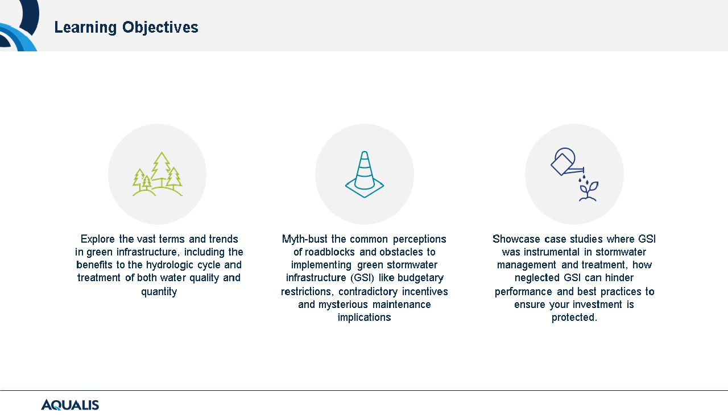We will be discussing maintenance protocols as well as some of the most prevalent green stormwater infrastructure. Additionally, we will showcase real-life case studies where GSI was instrumental in water treatment, how neglected GSI can hinder performance, and best practices to ensure your investment is protected. These case studies include newly developed green infrastructure and the maintenance challenges of ensuring the proper development and longevity of the system. Now that we've reviewed our learning objectives, let's get started.

First, let's explore the terminology, trends, and benefits of the shift from gray to green stormwater infrastructure. In this next section, we're going to establish for this presentation what we define as green stormwater infrastructure.

To better understand green stormwater infrastructure, it is important to note the differences between traditional gray stormwater infrastructure and green stormwater infrastructure. Gray stormwater systems were originally designed mostly to move stormwater away from buildings as quickly as possible. These manufactured systems are typically comprised of concrete or metal structures, including underground pipe and storm drains, helping to coin the term gray infrastructure.

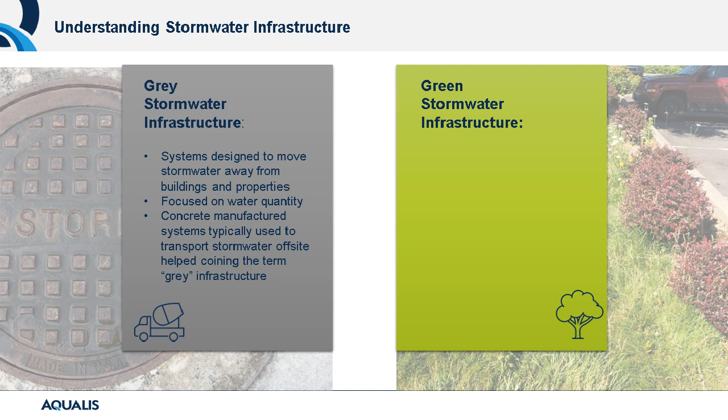Green stormwater infrastructure, on the other hand, utilizes porous materials, including soil, vegetation, and permeable pavements to mimic the natural hydrologic cycle of a site.

These systems are designed to capture the first flush of stormwater, which is often the most polluted runoff. By utilizing vegetation and natural processes, GSI offers ecosystem services including wildlife habitat, pollinator rest stops, groundwater recharge, biodiversity expansion, and more. This common use of greenery, including trees, grasses, and native vegetation, is what gives green stormwater infrastructure its name. However, not all GSI utilizes vegetation.

Other terms for green stormwater infrastructure include low-impact development, or LIDs, or nature-based stormwater strategies, all terms interchangeable when referring to green stormwater infrastructure assets.

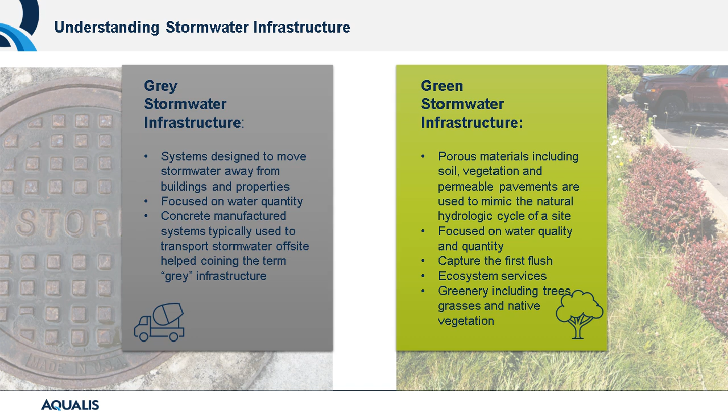What is green infrastructure? Green infrastructure, as defined by the EPA in the Water Infrastructure Improvement Act of 2019, focuses on three key components: storage, infiltration, and evapotranspiration. We are going to focus on these three components in the upcoming slides as the foundation of properly functioning GSI.

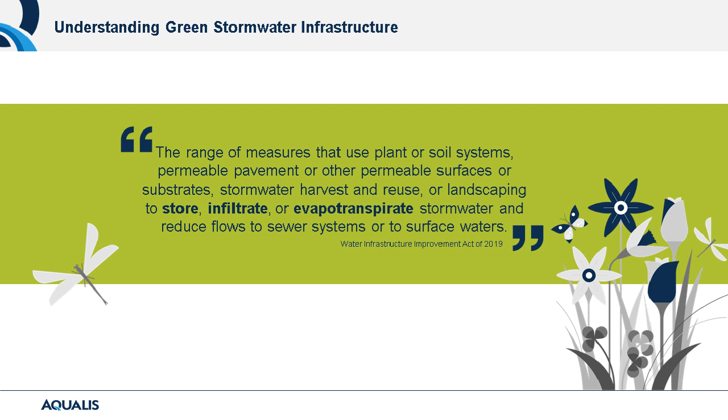While these definitions are evolving and changing, today's focus on this definition will explore GSI processes that bring both benefits and challenges to GSI stormwater management, including the implementation, maintenance, and functionality.

While much of GSI is based on mimicking and taking advantage of natural processes, encouraging proper runoff collection and storage, engineered elements of green stormwater infrastructure is essential to the process. This is especially important with GSI systems designed to capture what stormwater experts define as the first flush. This can vary based on municipal definition, but a good rule of thumb is the first inch of rainfall.

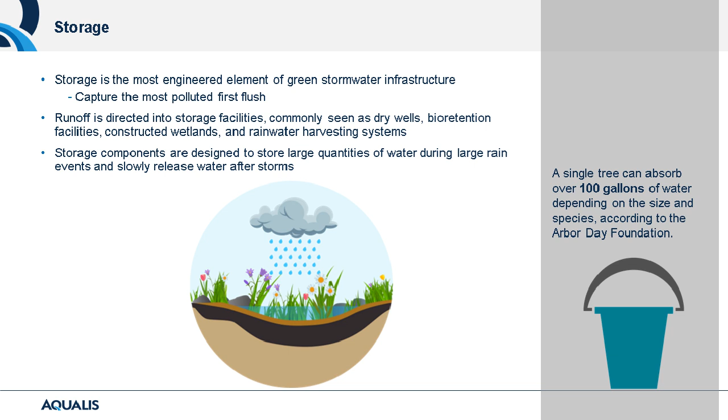Runoff is directed into storage facilities, commonly seen as dry wells, bioretention facilities, constructed wetlands, and rainwater harvesting systems. Storage components are designed to store large quantities of water during large rain events and slowly release water after storms. The use of vegetation is powerful within these systems. In fact, according to the Arbor Day Foundation, a single tree can absorb over 100 gallons of water.

When professionals think about GSI, infiltration is often the first term that comes to mind, as this process is what typically sets green stormwater infrastructure apart from traditional gray infrastructure. Arguably, the most important aspect of GSI is proper infiltration. After rain events, collected water slowly infiltrates into porous surfaces, including soil, vegetation, and permeable pavement, typically over a 48-hour period. This reestablishes the site's natural hydrologic cycle, allowing more stormwater to soak into the ground. Rain gardens drain within 12 to 48 hours, which is especially important in the treatment and control of mosquitoes.

Infiltration also increases water quality, allowing porous and permeable surfaces to act as a filter, removing pollutants. According to the Natural Resources Defense Council, bioswales can remove 90% of trace metals, oil and grease, 70% of sediment, and 30% of phosphorus. Unlike manufactured filtration processes, utilizing soils and vegetation does not require filter replacement and inspections.

Groundwater recharge is another great benefit associated with GSI, and is often a factor municipalities look for when considering sites for stormwater credit programs. Obviously, not all systems allow groundwater recharge—take green roofs, for example. Their location prevents any connection to allow groundwater recharge due to the placement of assets. However, for systems designed to allow groundwater recharge, like bioswales, bioretention cells, and constructed wetlands, this provides both ecological and economic benefits through aquifer water management, utility expense reductions, and environmental stewardship.

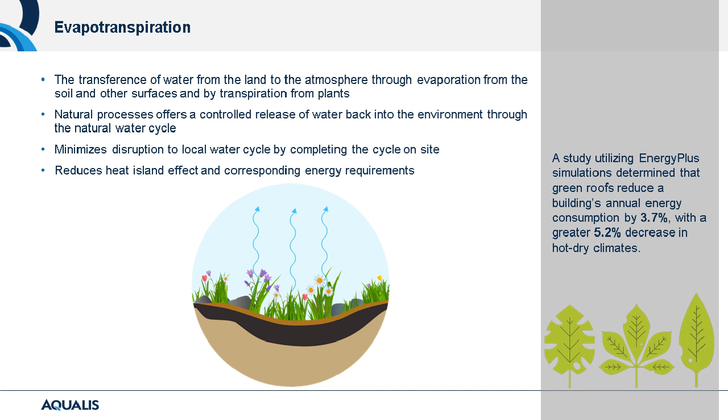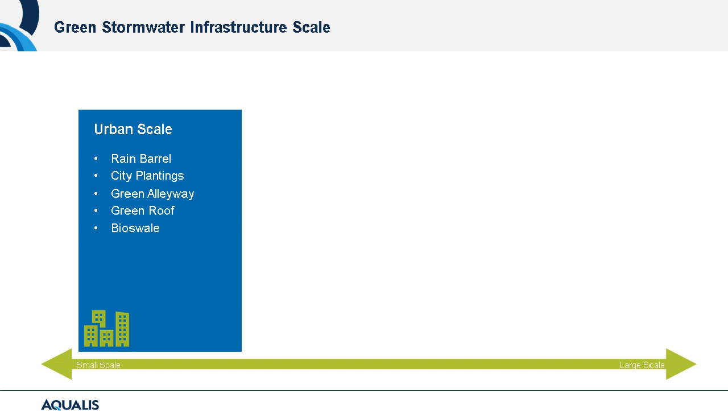GSI can be designed to support different scales of stormwater management based on site-specific requirements. On the smallest end of the spectrum is the urban scale. These systems are engineered to help reduce stormwater runoff, but are not designed to capture large rain events. Typically used in urban environments, these small-scale GSI solutions manage part of the stormwater runoff and are often used in partnership with traditional gray infrastructure. Examples include rain barrels, city plantings, green alleyways, green roofs, and bioswales.

At the mid-range, and the most common size of GSI, the neighborhood scale allows for stormwater management on a slightly larger scale, capable of capturing the first flush of larger commercial complexes and even entire neighborhoods. Examples include bioretention facilities, rain gardens, and constructed wetlands. These systems generally require more space than urban-scale GSI solutions, but are capable of handling larger volumes of runoff.

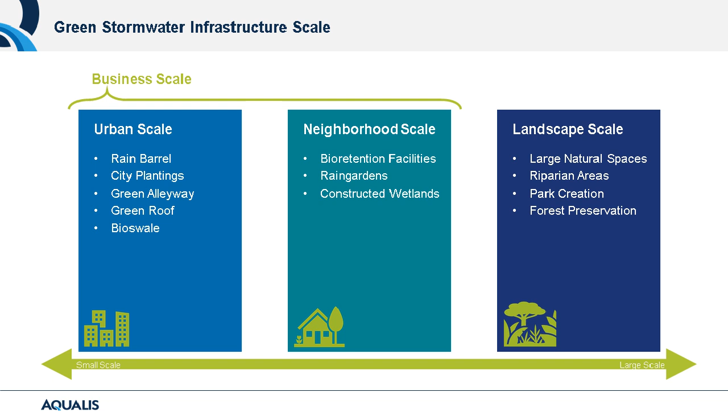At the largest end of the spectrum is the landscape scale. This includes large natural spaces, riparian areas, the creation of parks, and forest preservation. While this size of system offers the greatest stormwater management capability, these efforts typically require implementation at the municipal level. GSI in corporate and business spaces typically falls under the urban or neighborhood category.

The basis of this presentation, the gray area of GSI, is not meant to diminish the benefits of GSI, but rather to address the concerns many property owners and regulators have in the implementation and management of this new water management strategy. While public attraction, and in many cases demand, for GSI is growing, there is no unified front for green infrastructure. GSI is still a relatively new stormwater management practice, and as in all aspects, it takes time for governmental regulations to catch up to the changing times. Therefore, there are a lot of unknowns, inconsistencies, and impatience involved in green infrastructure.

It has been almost 50 years since the Clean Water Act was expanded in the 1970s, and still changes are being made to traditional stormwater management regulations, so it can only be expected that regulations around this new stormwater management practice are going to continue, expand, and change at a rapid pace. That said, where we are right now, there is no standard, universal understanding of what qualifies as green stormwater infrastructure. Incentives can vary drastically by region, state, and city, and currently, involvement is still largely voluntary.

As an organization, we have seen the greatest adoption rates in areas that offer incentives, including stormwater credit programs. As these programs are adopted by local and regional municipalities, that trend will continue to grow. Despite the challenges, the trend toward green stormwater infrastructure expands beyond the United States.

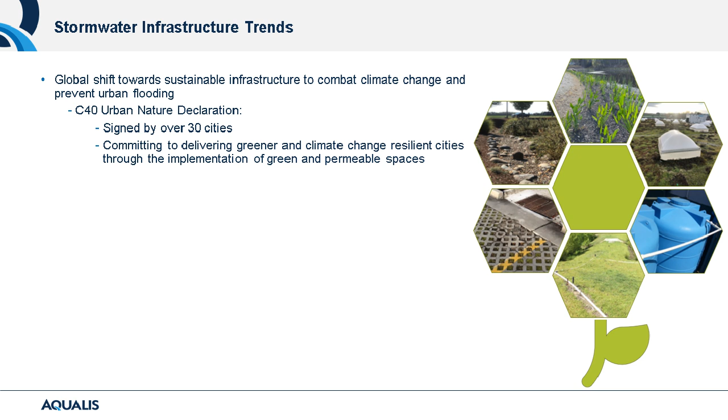This is a great step in the acceptance of GSI on a global scale, and we will continue to monitor the implementation of GSI in these cities as the forefront of the GSI movement.

Sponge cities, which have been developed in Germany, India, and China, use an abundance of green infrastructure, allowing the city to mimic a natural forest ecosystem and absorb stormwater runoff to provide clean water, groundwater recharge, reduce flood risk, enrich biodiversity, and cool the heat island effect.

Within the United States, the EPA has begun to embrace green stormwater infrastructure, providing resources for local governments, private developers, and other stakeholders to learn more about how to implement green infrastructure solutions within urban environments. We will now explore how U.S. cities and states have begun implementation.

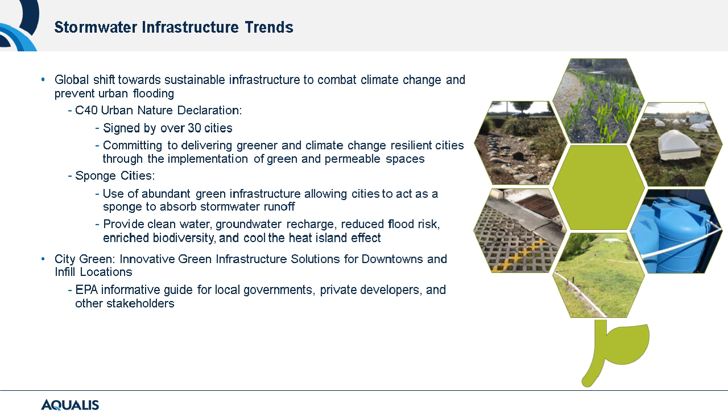The global shift towards green stormwater infrastructure has been driven by the many benefits GSI offers at the corporate, community, and environmental levels. For corporations, GSI offers a reduced flood risk, reduced utility costs, including stormwater, energy, and water, from which we will dive into further along in the webinar, acceptance into stormwater credit programs, and drives community awareness and involvement with organizations.

For communities, GSI provides aesthetic appeal and local beautification, has been proven to better community mental and physical health, makes green spaces more accessible, increases the appeal of communities for current and potential residents as well as tourists, and increases community education on relevant stormwater and climate issues.

At the larger scale, GSI provides benefits including better water quality, better air quality, reduced pollution, including chemical and thermal pollution, increased biodiversity, provides pollinator habitats, helps recharge groundwater aquifers, and creates more climate change resilient ecosystems.

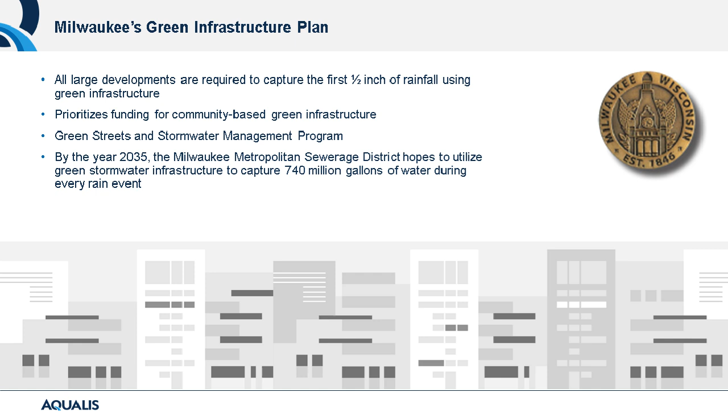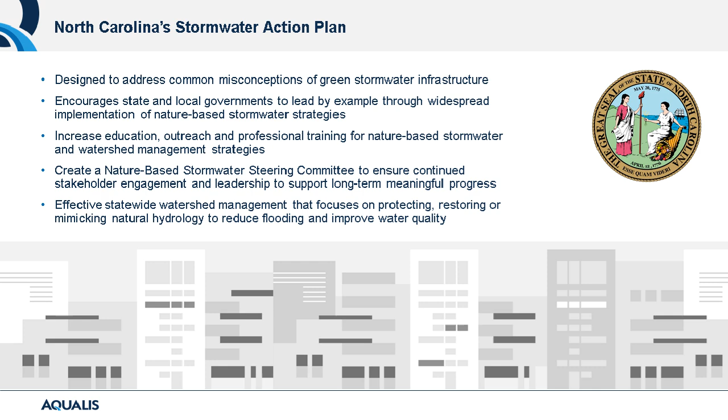At the state level, North Carolina recently drafted a stormwater action plan based around nature-based stormwater solutions, or green stormwater infrastructure. This education-based approach addresses misconceptions of green stormwater infrastructure, encourages governments to lead by example in implementation of GSI, and focuses on increasing education, outreach, and professional training for GSI and watershed management strategies. The state hopes to create a nature-based stormwater steering committee to ensure long-term support and progress, creating an effective statewide watershed management approach that focuses on protecting, restoring, and mimicking the natural hydrologic cycle.

In this next section, we're going to dive into the myths and common concerns associated with green stormwater infrastructure. We will break down some of the greatest perceived barriers to GSI and explore the truths based on our experiences as stormwater professionals.

Investment costs: according to the EPA, many municipalities are reluctant to implement GSI due to the belief that GSI costs more than traditional infrastructure. While retrofits may have sizable upfront costs, incentives, reduced maintenance costs, and the use of free natural flood control actually increase ROI.

Surface area sacrifice: it is commonly believed that GSI requires large, open spaces that are unable to be utilized for practical business processes, when in actuality, site-specific designs, including permeable pavement and green roofs, do not require additional surface area.

Shorter lifespan: it is believed that GSI has a shorter lifespan than gray infrastructure. While it is true average gray infrastructure can last upwards of 50 years, while green infrastructure is closer to 10, climate change has made gray infrastructure incapable of handling the increase in stormwater runoff due to the increase in frequency and intensity of storms. This has made the more adaptable and climate change resilient green infrastructure more beneficial for long-term stormwater management as water volume requirements continue to change.

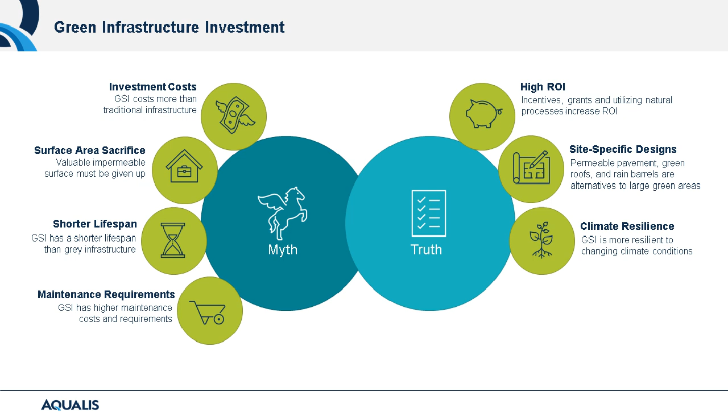Maintenance requirements: some are reluctant to adopt GSI simply due to the higher maintenance requirements. While the first few years after construction are instrumental in determining success and do require a more rigorous maintenance program, as systems mature, they become more self-sufficient and can theoretically become self-regulating, requiring minimal to no maintenance.

As briefly mentioned, funding is the greatest concern for property owners looking to install green stormwater infrastructure. To combat this, many municipalities have implemented stormwater credit programs that have become the most common incentive and main driver for GSI adoption by private corporations. While these programs offer great benefits to property owners, they come with their own unique challenges as well.

The first challenge comes from the regulations around GSI. Many stormwater credit programs are outlined based on what disqualifies systems rather than providing guidance to meet program qualifications. This can be confusing and discouraging for property owners, especially those who attempt to complete the drawn-out process only to discover their systems do not qualify.

Developed sites often find it difficult to qualify for stormwater credit programs as the rigorous standards can be challenging to meet by retrofitting already existing stormwater infrastructure.

The last main challenge stems from the lack of universal standards. Because qualifications for stormwater credit programs vary between municipalities and variations can be significant, companies that have properties across municipal lines can implement the same GSI at each site. However, some systems may meet the local stormwater credit program and not others.

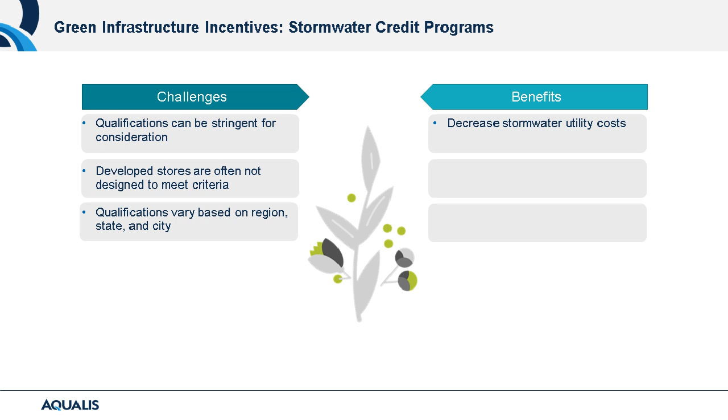That said, stormwater credit programs provide great benefits to property owners as well. Of course, those that qualify get the benefit of a substantial reduction in stormwater utility costs. In order to get qualified, many sites must work with certified stormwater professionals.

This allows stormwater professionals to learn the intricacies of your system, allowing for a better understanding of maintenance, inspection, and potential repair requirements. Lastly, through stormwater credit programs, property owners get to build relationships with local regulatory bodies, ensuring all regulations are met and mitigating notices of violation.

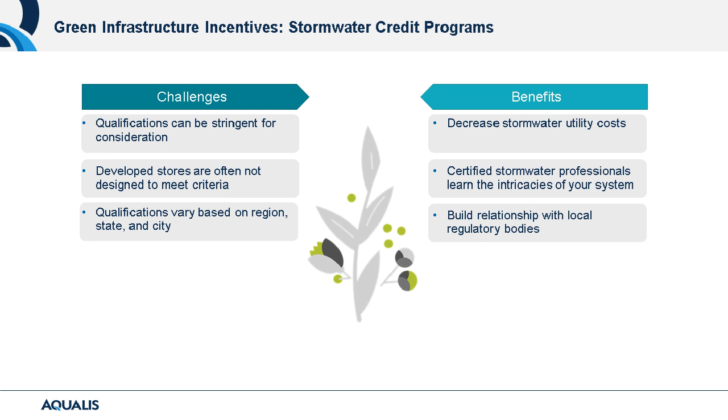Another popular incentive is grants and other funding opportunities. But just like stormwater credit programs, grants come with their own set of benefits and challenges.

First, many grant organizations require property owners to be proactive in reaching out or applying to receive funds. Unlike stormwater credit programs, which are relatively easy to find on governmental websites, finding potential grants requires research and outreach on the part of the property owner.

If your GSI does receive grant funding, it may not be from a governmental organization. This adds another layer of challenges and steps to ensure all GSI meet local regulations. Lastly, grants and other forms of funding are typically just for the installation of GSI. They do not cover the continued maintenance costs associated with maintaining GSI.

Grants do offer unique benefits. For example, there are a variety of organizations to partner with, including watersheds and environmental organizations. Grants can partially or entirely fund the construction of GSI, which can provide relief to property owners put off by the high cost of implementation. Lastly, working with public and environmental organizations allows for publicity, stormwater education, and community involvement with your site.

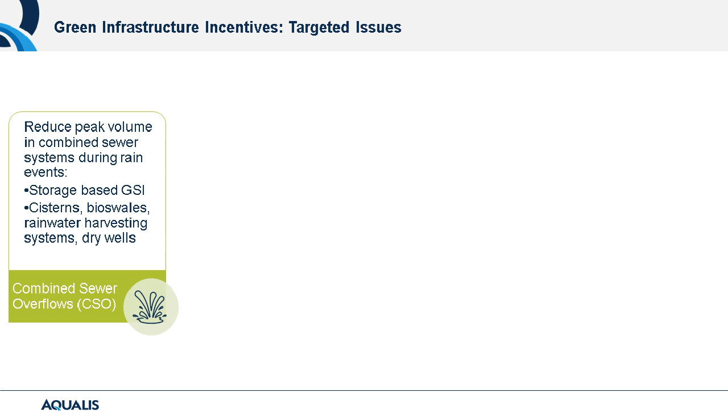Some cities, including Philadelphia and Milwaukee, have a combined sewer system, one in which stormwater and wastewater use the same underground utilities. These systems are designed to overflow during large rain events to prevent flooding of water treatment facilities. However, during these overflows, untreated wastewater is released into the environment, creating environmental and health safety concerns. Cities that experience CSO often incentivize GSI to reduce peak volume reaching the combined sewer system, therefore reducing the frequency of CSO events. If this is a criteria for your stormwater credit program, GSI that offer plentiful storage should be considered. This includes cisterns, underground storage and reuse systems, and bioswales.

Groundwater recharge: aquifer recharge and recovery are a priority in areas that utilize the underground water supply faster than it can currently replenish. These municipalities prioritize GSI that allow for infiltration and groundwater recharge, like permeable pavement and sand filters.

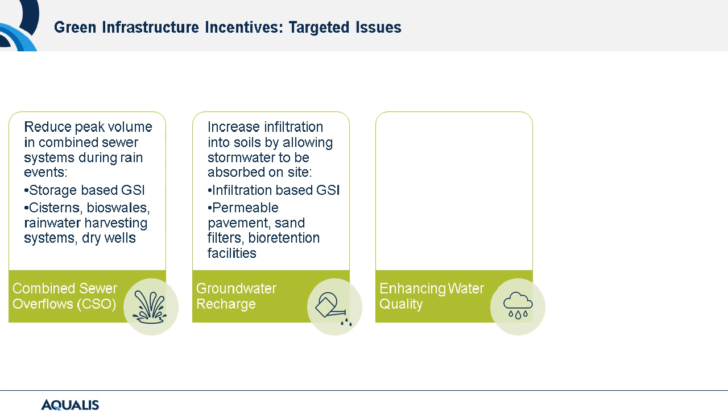Water quality is another main concern for municipalities. For these locations, explore filtration-based GSI like constructed wetlands and bioretention cells or ponds that offer a natural filtration and pollution extraction process.

Lastly, green space accessibility. Many municipalities see the benefits in GSI for beautification and aesthetics. To meet these goals, focus on vegetation-based GSI, such as riparian habitat and green roofs that offer local green spaces.

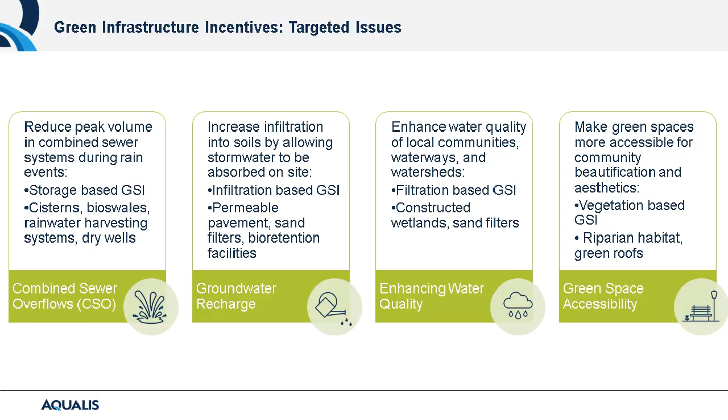Now that we have established what GSI is and the benefits that come with implementation, let's explore how to determine what GSI is right for your site and the maintenance requirements of 4 of the most common GSI systems.

The first and one of the most prevalent GSI systems is bioretention cells. Bioretention cells are landscape depressions that capture and treat the first flush of runoff from surrounding impermeable surfaces and then dry out between storms. They are typically found in parking lots or along roadways.

A site that is a good candidate for bioretention cells is one that allows for decent-sized surface area sacrifice for the development of bioretention cells, has permeable soils that allow for infiltration. The water table must be greater than 4 feet below the surface to allow proper function, and for sites whose goal it is to capture water runoff from the first flush. If looking to meet local stormwater credit requirements, these systems reduce combined sewer overflow, allow for groundwater recharge, increase water quality, and add green space.

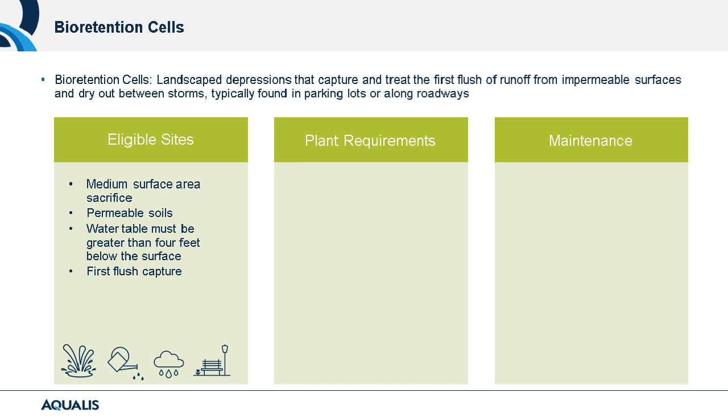Bioretention cells require specific plant requirements, including plants that are flood and drought tolerant, as these systems pool water during storms and then dry out completely between events. They must have high vegetative diversity to minimize erosion, increase water filtration, and support absorption events, and non-aggressive root systems. This is especially important in clay soils, as some trees and shrubs with aggressive roots will intrude into underground pipes looking for air. Aesthetic appeal is also important, since these are found in parking lots and roadways, there is always a desire to make these systems aesthetically pleasing either to customers or communities.

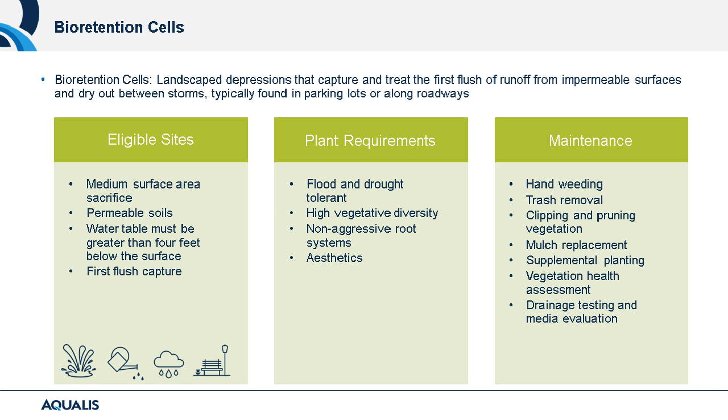Preventative maintenance for bioretention cells typically comprises of hand weeding, trash removal, vegetation pruning, mulch replacement if displaced to prevent compaction and ensure proper infiltration, supplemental planting, vegetation health assessment, infiltration testing, and sediment removal when needed.

Rain gardens are comprised of a collection of native vegetation planted in a small depression designed to temporarily hold and slowly infiltrate stormwater runoff. Your site would be a good contender for a rain garden if there's the ability to sacrifice a small area for the garden's construction, the soil is permeable to allow infiltration, it is a non-wooded site as water could damage roots of surrounding trees, there is a gentle to moderate slope, the site receives frequent small rain events, receives full to partial sun, and is in need of first flush capture.

If you are looking to meet municipal goals to receive stormwater credit, rain gardens can help prevent CSO, allow for groundwater recharge, increase water quality, and add green space.

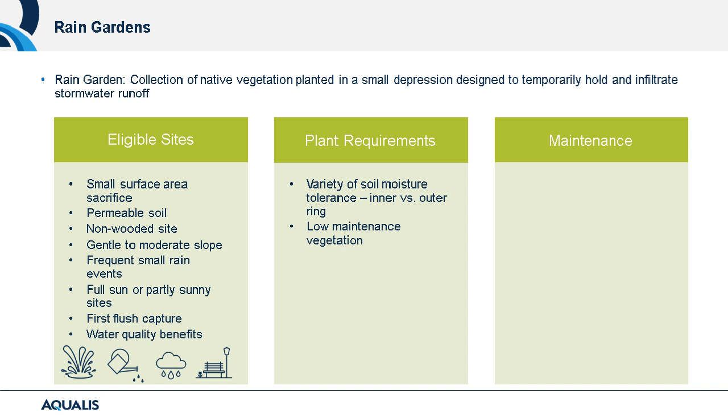The requirements that make plant species viable for GSI differ based on the systems implemented. For rain gardens, plants used in the inner rings must be tolerant of high soil moisture, with the outer ring needing to survive both wet and dry conditions. Vegetation must also be relatively low maintenance, as accessibility, especially with high-powered machines, is limited to prevent soil compaction. Lastly, vegetation must be aesthetic to appeal to visitors.

Standard maintenance requirements for rain gardens include hand weeding, trash removal, vegetative pruning, mulch replacement when needed to prevent soil compaction, supplemental planting if vegetation dies or becomes too spacious, vegetation health assessments, drainage testing, watering during dry spells, and sediment removal when necessary.

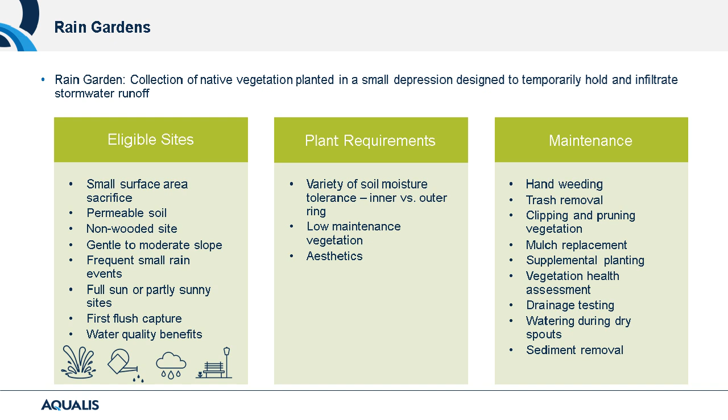Green roofs are partially or fully covered with planted vegetation. Eligible sites do not need to sacrifice surface area, just roof space. They must have a flat or low roof slope, no more than 30 degrees, and strong structural support, since green roofs are heavier than traditional roofing. A standard green roof is about 20 pounds per square foot heavier after a rain event.

The roof must receive minimal wind uplift. Like a standard roof, wind pressure may damage green roofs and potentially pull greenery off the roof. They also require rainfall absorption. Green roofs do not collect surrounding impermeable surface runoff, but instead absorb rain that falls directly on the roof. For stormwater credit programs, green roofs reduce CSO, provide better water quality, and add green space.

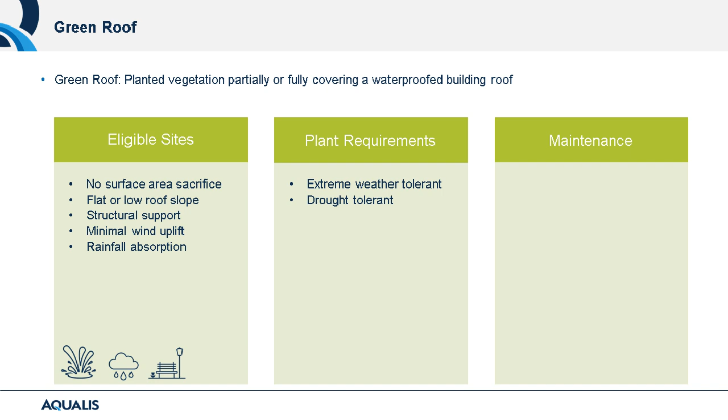Plants on a green roof must be extremely weather tolerant, as roofs get especially hot during summer days and exceptionally cold on winter nights. They must also be drought tolerant, since green roofs do not contain much soil, allowing the entire soil substrate to dry out between infrequent rain events. Plants must have short root systems to prevent intrusive roots from damaging the roof or waterproofing elements.

Plants can be intensive, more work to manage and more like a traditional garden, or extensive, with natural and less manicured growth.

Maintenance on a green roof includes hand weeding, trash removal, drainage inspection and leak detection to prevent water damage, supplemental planting when necessary, vegetation health assessments, structural inspections of waterproofing elements and building integrity, and soil substrate inspection and evaluation for erosion and pH balance.

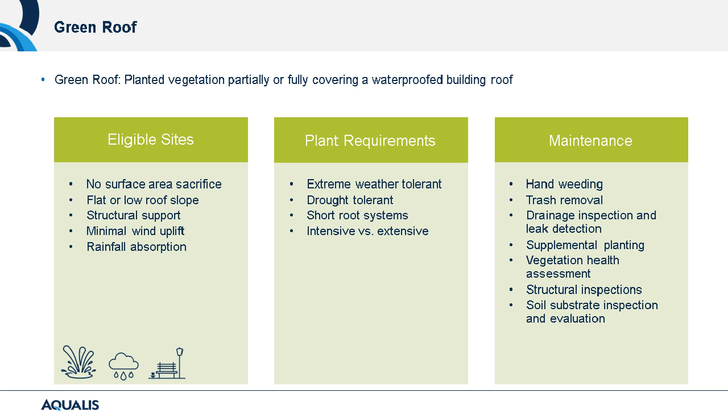The last GSI we will dive into is permeable pavement, a pavement alternative comprised of porous materials that allow stormwater runoff to be absorbed and held in subsurface stone reservoirs.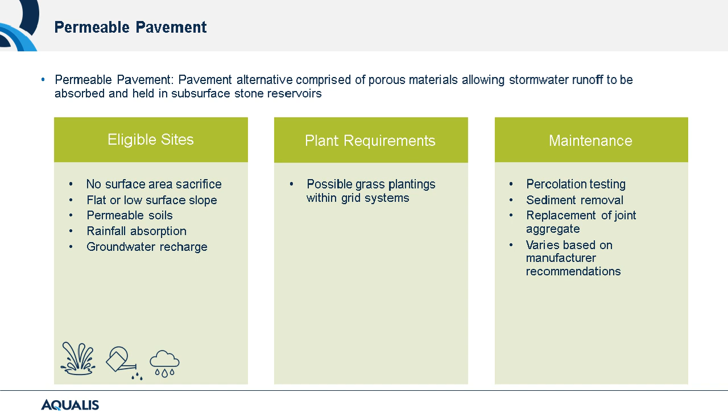While most deficiencies are avoidable with routine preventative maintenance by a stormwater professional, we do think it is important to address the most common deficiency concerns and how to address them within GSI systems.

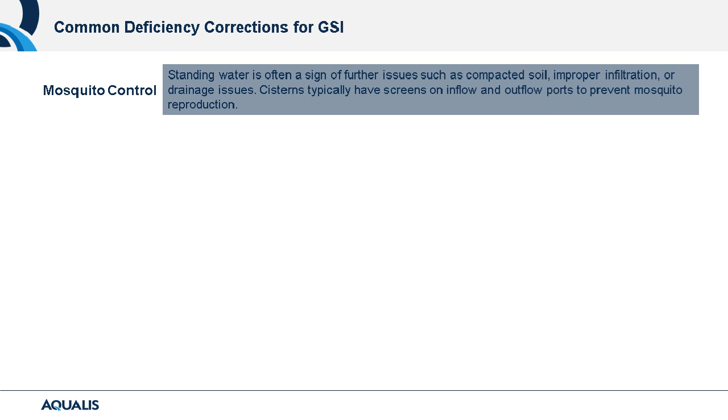Mosquito control: as with all stormwater management systems, mosquito control is important. Within most GSI, apart from constructed wetlands, standing water is often a sign of further issues such as compacted soil, improper infiltration, or drainage issues that need to be addressed. For systems like cisterns, they typically have screens on inflow and outflow ports to prevent mosquito reproduction.

Erosion: if your system is experiencing erosion, retrofit the asset to include energy dissipation devices to reduce stormwater velocity upon entry into the GSI. GSI with improper drainage are also prone to erosion.

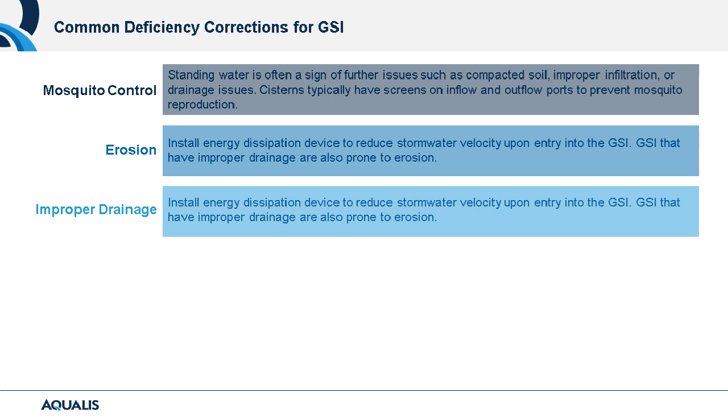Improper drainage: schedule an inspection with your stormwater management provider, but improper drainage is often caused by sediment accumulation, which must be removed.

Invasive species: routine maintenance will prevent invasive species from growing excessively within GSI through hand weeding and spot treatment. If your system is overrun with invasive species, further corrective action and possible repairs may be required.

Compacted soil is often a sign that the original construction was not completed properly, typically impacted by the use of heavy equipment. If this is the case, the soil substrate will need to be replaced and reinstalled using the appropriate construction methods to prevent soil compaction.

When green infrastructure is part of a preventative maintenance plan, all of these deficiencies can be closely monitored, especially during the first year after construction.

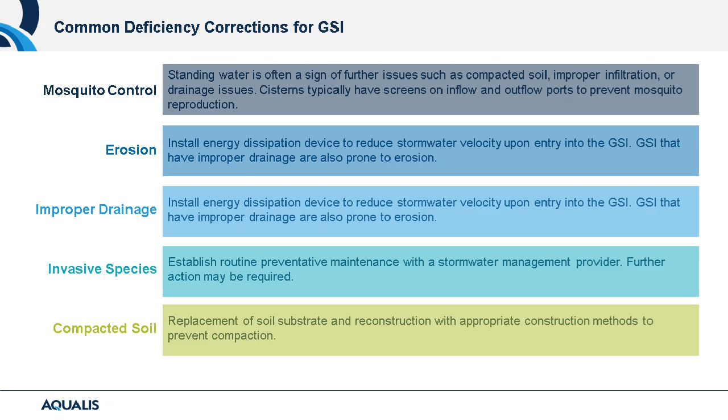Now, let us explore some real-world examples of GSI maintenance, taking all of the components we have discussed so far and applying them to specific sites.

In our first case study, we're looking at a multi-site client that has a preventative maintenance plan with AQUALIS. We have been routinely monitoring this location and the infiltration rate of their permeable pavement.

This location has two types of permeable pavement. Each requires maintenance recommendations per the manufacturer. One requires a more intense maintenance approach. This type includes joint aggregate, seen here in the pictures to the right, and is located in a high traffic area.

Per the manufacturer's recommendations, this type of pavement requires monthly visual inspections, including breaking up of the crusted material that may be covering the joint aggregate material and preventing infiltration, and targeted industrial vacuuming when percolation testing determines a site needs cleaning.

Percolation tests include a simple frame that is filled with water and timed to assess percolation or infiltration rates. An infiltration rate of 30 seconds or under is exceptional and does not require maintenance. Once infiltration rates reach 90 to 300 seconds, action is required.

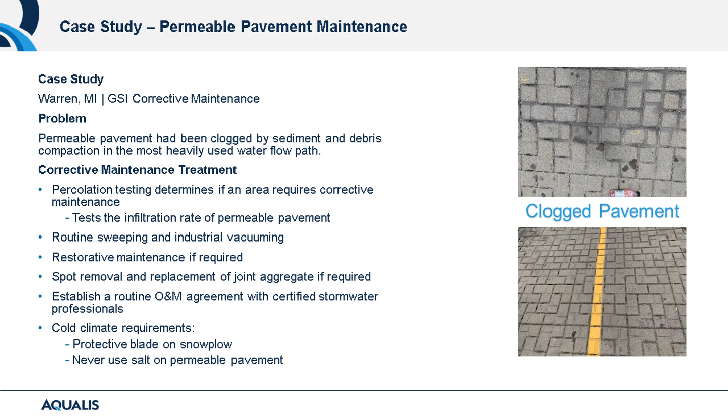Use of a protective blade is important on a snowplow to prevent damage to the assets, and salt should never be used on permeable pavement as it erodes the aggregate material and adds to the sediment collection. As a reminder, it is essential you are aware of manufacturer requirements and partner with stormwater professionals to maintain these systems properly.

This next site is located in Lake Forest, Illinois, and includes multiple green infrastructure assets on site. AQUALIS has a routine preventative maintenance agreement with this client to monitor growth, reseed, and provide corrective maintenance when necessary.

Here you can see that a nuisance species has taken root among the planned vegetation. Regular inspection for and removal of nuisance species is vital in ensuring the health of green roofs. Nuisance vegetation can quickly overtake, reducing the infiltration of the native plants intended to embrace the hydrologic cycle and reduce pooling of water. It is important to have trained stormwater professionals maintain these systems, as untrained landscapers and property managers may end up damaging green roofs.

By allowing unintended species to grow within these delicate systems, without removal, invasive and nuisance species can consume the area and limit function. Just because it is green doesn't mean it's helpful.

While the presence of unplanned species is inevitable, hand removal and spot treatment by stormwater professionals mitigates the threats posed by weeds. Once nuisance species are removed, it is important to inspect the buried assets to ensure intrusive roots or other damages did not occur.

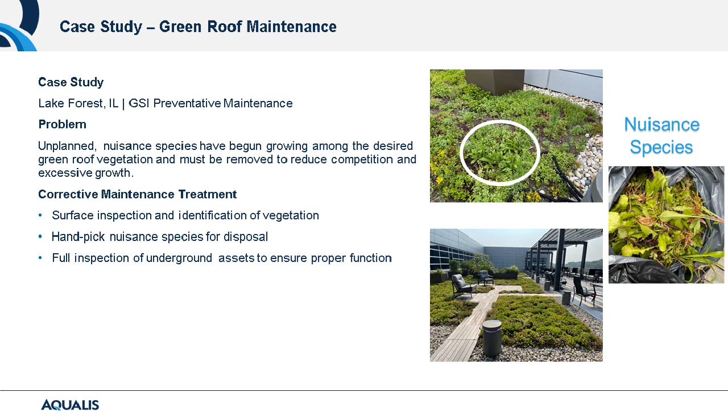This is another great example of nuisance species. This site is located in Cottage Grove, Minnesota, and is part of a multi-site preventative management program. This site is maintained to ensure proper functionality and growth of the native vegetation.

It is also important to monitor ground level systems in cool climates throughout the winter to ensure snow is not being stored on top of systems. If snow is piled onto GSI, it can lead to clogs, soil compression, and blocks rainfall from entering systems while snow is present.

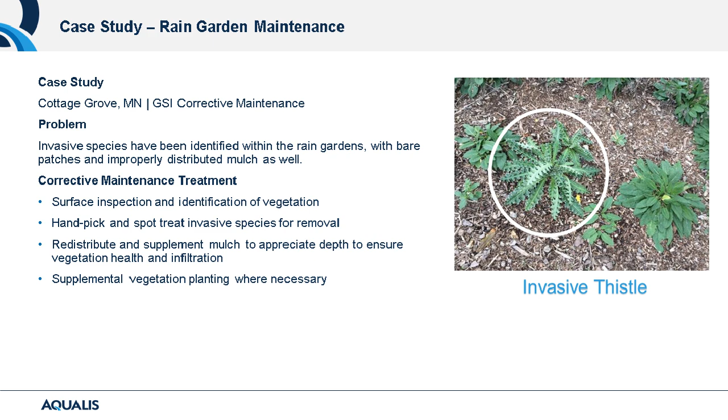Here we see a new system that requires extensive monitoring to ensure the proper establishment of plant growth, as well as proper monitoring of compaction, sediment collection, and overall functionality. Since these systems are delicate in nature, properly applying intensive maintenance in the first few years will secure this site for success.

As the system matures, one can begin to reduce frequency of maintenance when growth is established and infiltration is monitored, so that the system becomes almost self-sufficient with minimal maintenance, oftentimes quarterly, to remove trash and replant when needed. This site has a newly implemented rain garden, and AQUALIS was hired to provide post-construction maintenance.

Maintaining systems at this stage determines the fate of your system. If vegetation is not able to fully establish, it may die off and the system will fail. In this case, the site was receiving increased heavy sediment accumulation that must be manually removed and evaluated.

As we continue to monitor the site, it may be warranted for the original designer and construction team to address either a construction malfunction or design issue that is causing the increased sediment to accumulate. Again, establishing maintenance and monitoring post-construction ensures the investment into green stormwater infrastructure increases ROI, reduces property flooding, and ensures system functionality.

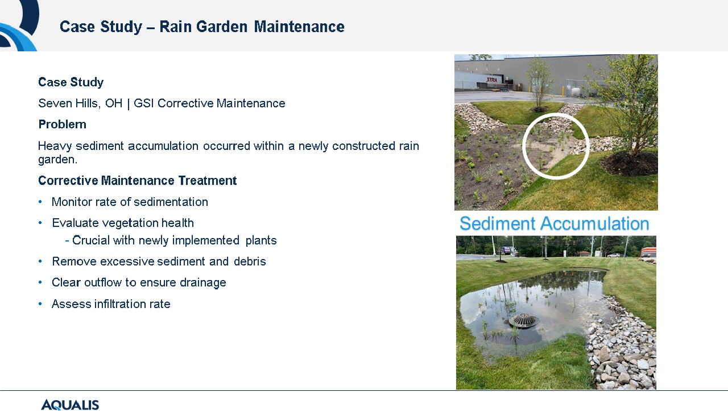What action can you take? First, research your local GSI regulations and incentive programs to determine if GSI is right for your city or site.

Educate and spread awareness regarding GSI best practices, including providing the appropriate arguments to those common myths and barriers we spoke about earlier in the presentation.

If you have GSI on your property, establish proactive routine maintenance inspections with a green stormwater maintenance professional to protect your investment and encourage the proper storage, infiltration, and embrace the site's evapotranspiration.

And lastly, installing, retrofitting, and repairing your site with GSI to optimize function, increase your site's aesthetics, and embrace the future of the next generation of stormwater assets.

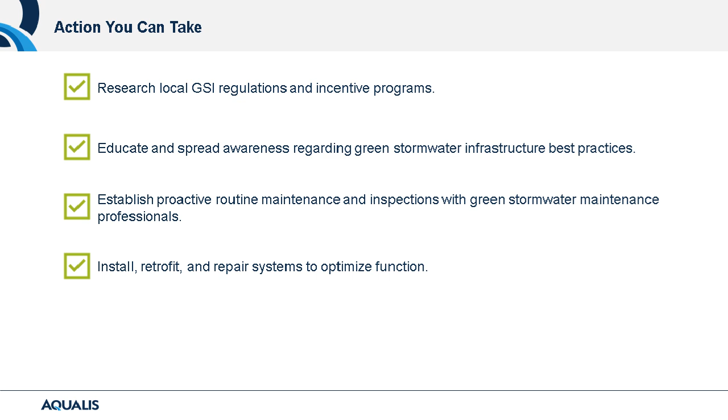As we close our formal presentation, I want to share a bit more information about the AQUALIS difference and how we assist property owners, municipalities, and regulators across the nation in providing stormwater management.

AQUALIS is the leading nationwide provider of stormwater and lift station management services. These services include preventative maintenance, corrective maintenance or repairs, retrofit and redesign, as well as emergency response.

AQUALIS helps protect your assets, mitigating notices of violation of stormwater control measures, diminishing flooding risks, and supporting your efforts in environmental stewardship. We partner with retail, commercial, industrial, municipal, healthcare, hospitality, educational, and governmental industries.

We service single-site and multi-site organizations through our preventative maintenance programs. With more than 20 years of experience in the water resource industry, AQUALIS provides innovative and leading-edge solutions to meet budget constraints and exceed compliance expectations.

With programs that ensure quality, like our Quality Assurance Program, we strive to deliver an exceptional client and raving fan experience.

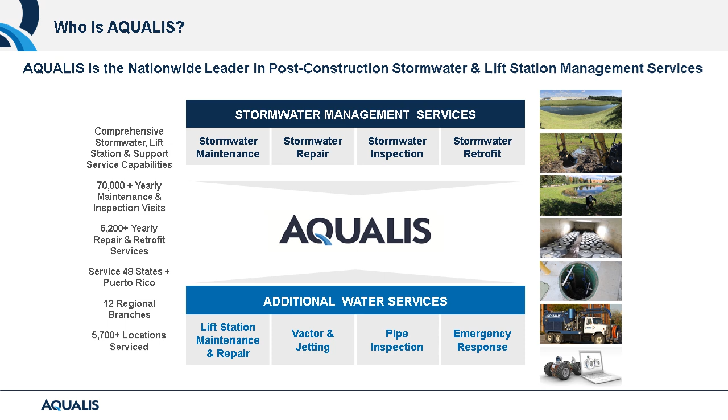As the leader in stormwater and lift station management, we are pleased to partner with and educate property owners on the importance of preventative maintenance and water compliance.

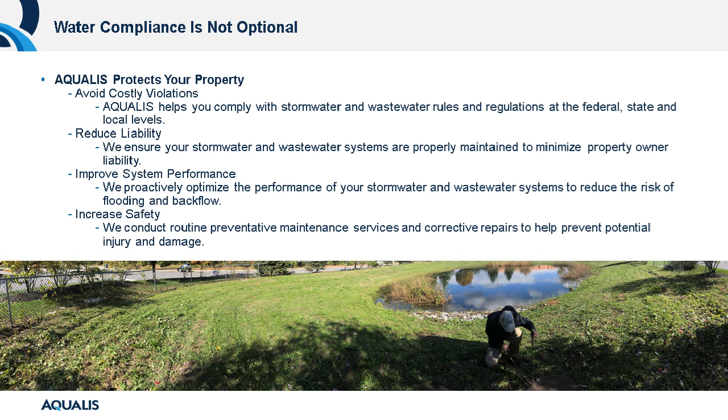With AQUALIS preventative maintenance programs, we can help building owners and facility managers avoid costly violations, reduce liability, improve system performance, and increase overall property safety.

We are a team that prides ourselves in safety, compliance, and education. Our teams are highly specialized in their fields, from stormwater inspectors to certified confined space training.

Our certifications include state-level certificates, where applicable, as well as product-specific certifications to properly install and manage these stormwater assets. Many of these certifications include routine continuing education for renewal to ensure that we are following the most up-to-date regulations and processes.

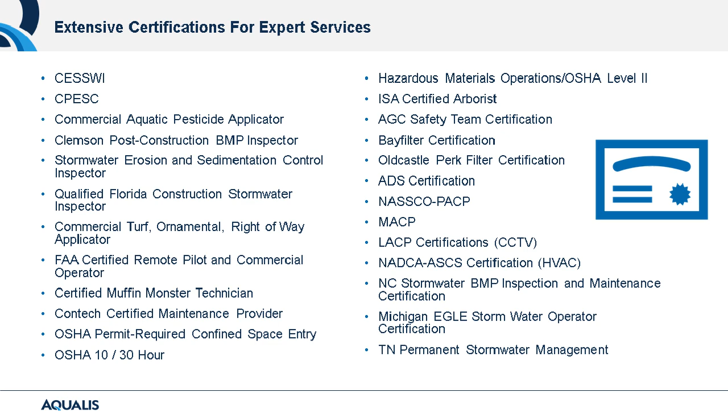Good day, everyone. Thanks, Erin. Very well done. I think we're just going to jump into a couple of questions that we had.

One of those questions was, how do you prevent mosquitoes in some of these systems? Erin, you touched on that briefly, but regarding any systems that are designed to trap water and hold it, like cisterns or systems like that, there are methods we can use, basically covers, screens, and things to prevent the bugs from getting in there and laying the eggs.

Regarding the green infrastructure specifically, rain gardens, bioretention cells, items like those, these are not designed to hold water for a very long time. Again, Erin, you touched on it, typically 24 to 48 hours those systems should drain out.

If we get into a situation where there's standing stagnant water that's a good breeding ground for mosquitoes, the remedy is to check out the asset as a whole and make sure it's infiltrating as it should. We can get into things like wetlands that may have standing stagnant water for a while, and there are treatments a stormwater professional could apply to make sure we get those mosquitoes taken care of or reduce them as much as we should.